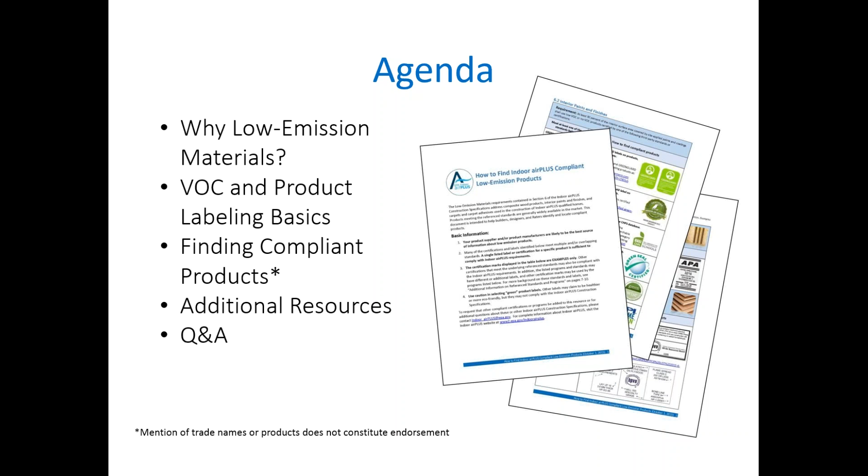If you know where to look, they are accessible, and hopefully Nick will walk you through this resource that is online and also in your panel for the webinar. You can download this document to the right as well as the construction specifications so that you'll have these to work with. Hopefully many of you have already been using it. We'll talk a little bit about some other additional resources, and then our hope is that we're going to finish in plenty of time for some Q&A.

We're assuming that all of you on this webinar have some knowledge of Indoor airPLUS, because we're digging in here to a very specific piece of the overall program. But this one slide is for the few that may not be fully oriented to what Indoor airPLUS is. As I'm sure 90% of you know, this is a companion label to the Energy Star label

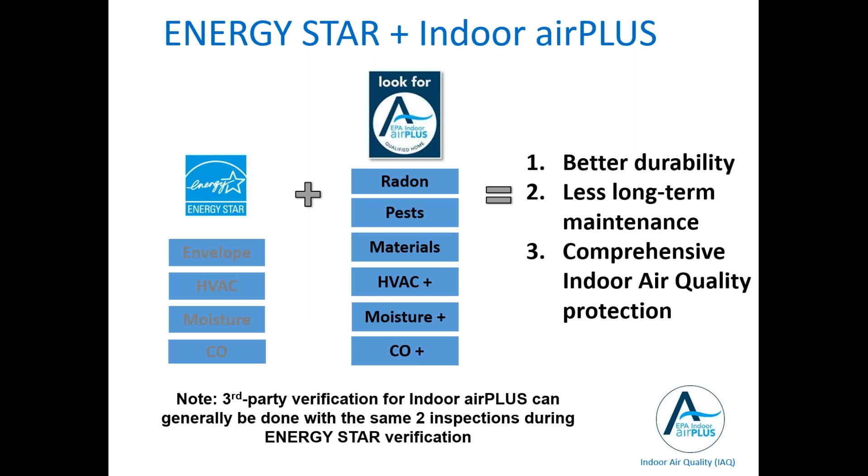that adds some additional source controls for some specific pollutant types onto the already very sound building science foundation that is the Energy Star program. And so the 6 major areas that we cover in terms of pollutants are radon, pests, materials or product emissions, HVAC, moisture, and combustion pollutants. And today we're just going to focus on the materials, which is section 6.

The construction specifications are very important for everyone to have and utilize whenever they are trying to either develop specifications for a home that are compliant, or you're rating a home. You need to really know what the specific language is in the specifications themselves. So while the checklist is helpful and the resource for things like the emissions is helpful, none of it is a substitute for the spec.

So revision 3 is the latest spec. We put that out last fall, right after Energy Star revision 8 came out, and so everything is aligned with Energy Star revision 8.

Okay, so let's start with, it seems like an easy question, but it's actually really complicated, and that's what are VOCs? Because VOCs are essentially what section 6 is all about. There are, as I'm going to tell you about in a minute, multiple definitions of VOCs, but in general, this is a large group of carbon-based chemicals that easily evaporate at room temperature. That's kind of the basic definition. Examples include many that you've heard of: acetone, benzene, formaldehyde, perchloroethylene.

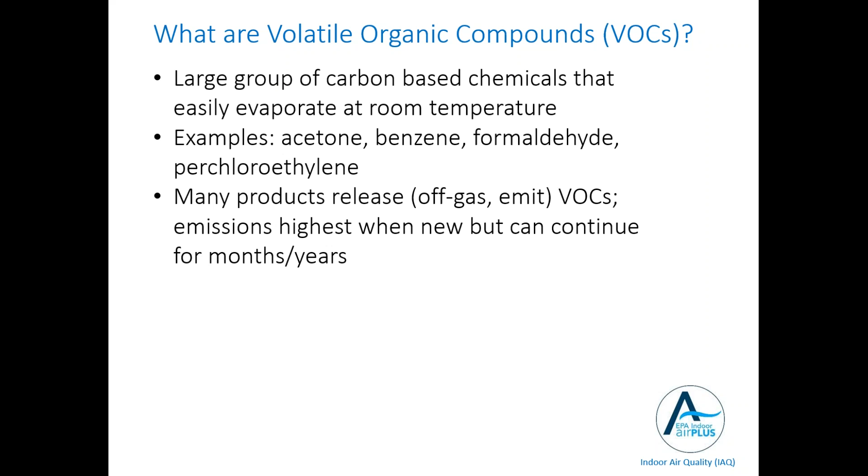There are thousands of VOCs that are present in a variety of products and that are emitted or off-gas from those products over time, and are generally much higher when the product is new, higher when the product is wet applied, and diminish over time, but can continue for months or even years, and some for many years at very low levels. So this is all about trying to produce homes with products that release the least harmful and the least quantity of VOCs.

There are a lot of complexities to levels in homes. It's not easy to really ascertain what levels you may have at any given time, because there are lots of things in play: the amount of the VOC, the rate of release of the VOC, and that can be affected by things like temperature and humidity, room volume, ventilation rate. All of these things impact the degree to which VOCs may build up in a home.

There are studies from quite a long time ago, actually, but there are studies of VOCs in homes that have consistently shown that levels can be 2 to 5 times higher than outdoors for VOCs that are present indoors, typically because of an indoor source. And immediately after use of some products like an aerosol, you're going to have very high levels and potentially very high exposures to some of these VOCs.

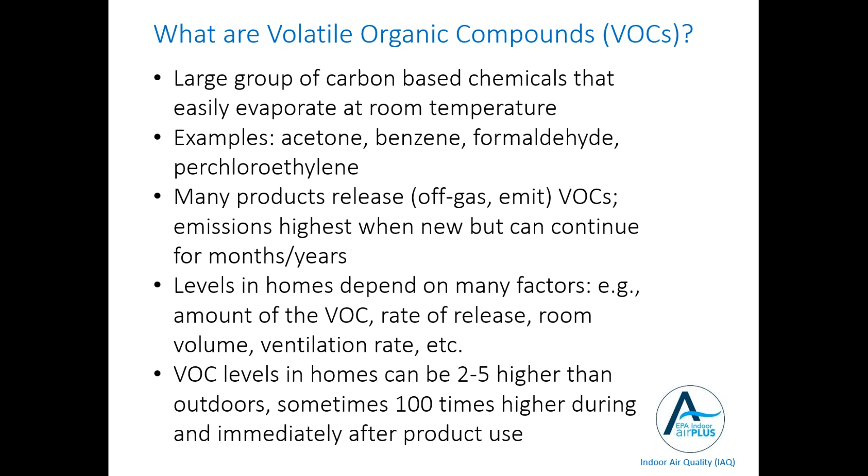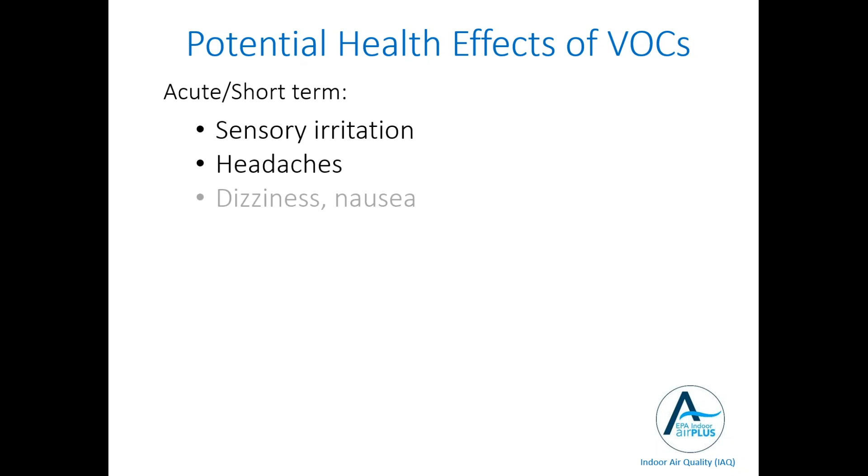We don't know everything we would like to know about VOCs. We know a fair bit about some. We know next to nothing about others. We do know that a lot of them have the potential to cause health effects that are both acute and short-term, which are things like sensory irritation, headaches, dizziness, nausea, allergies, asthma, as well as chronic and long-term effects, and those include an increased risk of cancer and potential for liver, kidney, central nervous system damage.

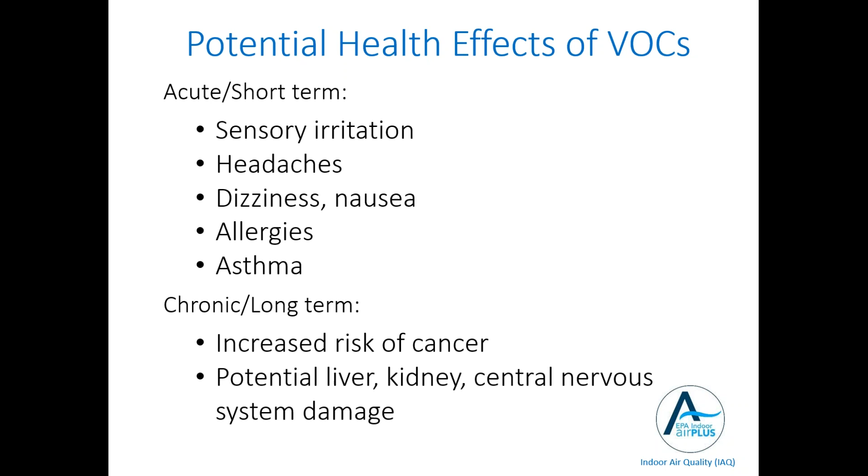So whether or not an individual VOC is going to cause harm or potential health effect to an individual is also unpredictable to a large extent. So much of what we do in indoor environments is do our best to try to keep levels of all contaminants as low as you reasonably can. And low-emitting materials are one of several ways of trying to keep pollutant levels down.

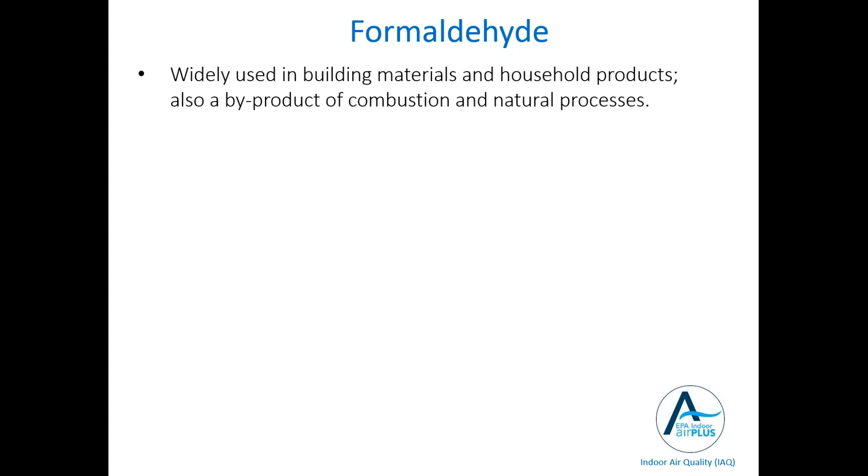Formaldehyde I'm going to touch on because a good chunk of Section 6 addresses formaldehyde emissions. I think everyone is quite aware that formaldehyde is probably the most widely recognized by name of VOCs that are out there, partly because it's so widely used in building materials and household products. And it's also ubiquitous in nature. It's naturally produced and forms through a variety of processes, including combustion of fuels. So you will always have some level of formaldehyde indoors and out. The issue is whether or not you have levels of formaldehyde that are significantly elevated and pose potential risks.

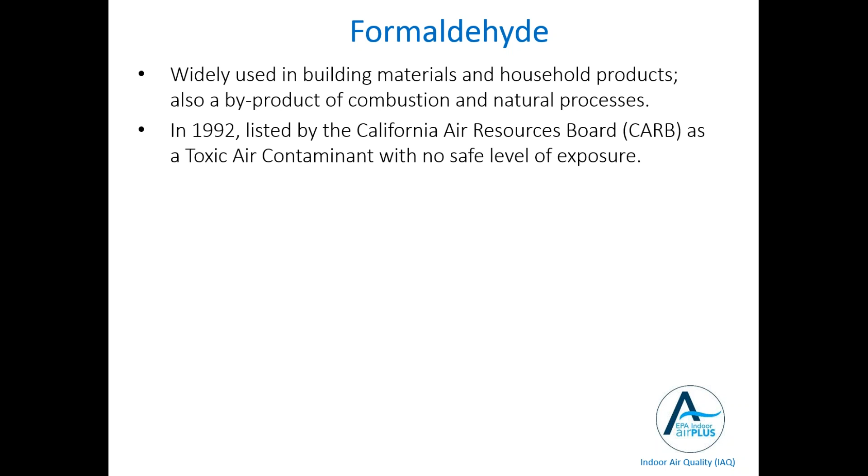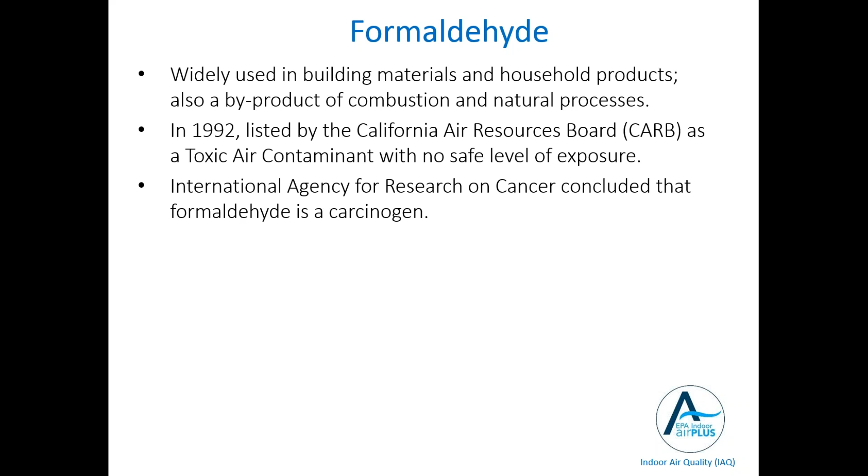In 1992, California Air Resources Board first identified formaldehyde as a toxic air contaminant and decided there was no safe level of exposure. IARC, the International Agency for Research on Cancer, has concluded that it's a known carcinogen. EPA considers it a probable carcinogen at this point. Formaldehyde has been linked to lots of different kinds of effects in the near term, exacerbation of asthma in those who are formaldehyde sensitive and possibly other asthmatics as well. It is known to cause eye, nose, and respiratory irritation and difficulty breathing and nausea. So formaldehyde is a bad actor.

You've all heard of Lumber Liquidators and the issues that go around episodes of high formaldehyde levels, generally from composite wood products. It goes back to the FEMA trailer issue several years ago, and periodically these things crop up. So formaldehyde is clearly one of the actors we're trying to address here.

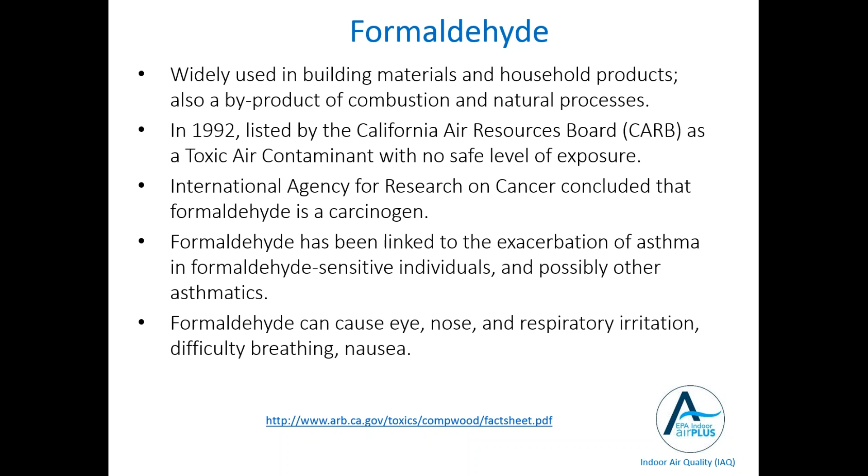So the field, as I think many of you are aware, because we know less than we'd like to about health effects of VOCs and measuring them poses challenges, is really a complicated and evolving field. And so the programs and labels and certifications have evolved in part because of the history of how VOCs have been treated over the course of several years.

And this slide is going to be an important one for people to sort of get the distinction between why VOCs, as they are regulated, are not necessarily all of the VOCs that we care about in the indoor air. But VOCs have been regulated under the Clean Air Act for decades, and the South Coast Air Quality Management District in California has been regulating VOCs for decades.

But the Clean Air Act really is only regulating the VOCs that react with sunlight to form ground level ozone in outdoor air. They are not at all concerned in the Clean Air Act about indoor air pollutants. And this is simply because when the Clean Air Act was passed, indoor air just wasn't even on their radar. It just didn't even get considered.

And as a result, there are VOCs that are exempt from the Clean Air Act, but are still of concern potentially indoors. And these are things like perchloroethylene, which is the commonly used chemical in dry cleaning, methylene chloride that's used in lots of different consumer products, paint strippers, cleaners, a whole range of products, and acetone, which is a very, very common solvent widely used in a great many household products. These are things which are exempt from the Clean Air Act.

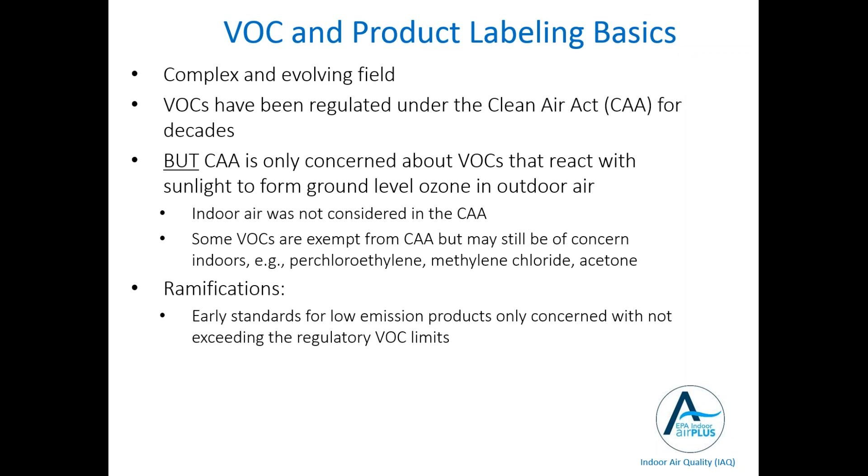So the upshot of all of this is that because the early standards for low emission products were only concerned with not exceeding the regulatory VOC limits, most of the programs in the early years, and we're talking 70s, 80s, even into the 90s, were concerned with the content of a particular product in terms of the amount of VOC going into the product, either by weight or by volume. But again, only concerned with those VOCs that are actually regulated, not the entire universe of VOCs.

And so they were concerned with total volatiles, or TVOC as some of you have heard the term, but they weren't paying attention to the individual VOCs that are actually emitted into indoor air. They were concerned with the total amount that might be emitted to the atmosphere to form ground level ozone in the outdoor air.

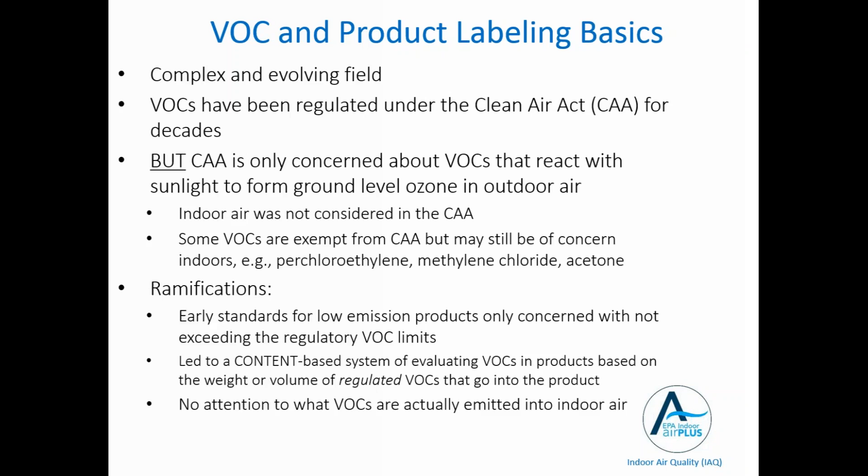So in indoor air, we're concerned with a very different population, and those are the populations who are spending 80 or 90% of their time in their homes, in their schools, and in other buildings. And we are concerned not just with what may be given off of a product in terms of total volatiles, but we're concerned about the individual chemicals that are present.

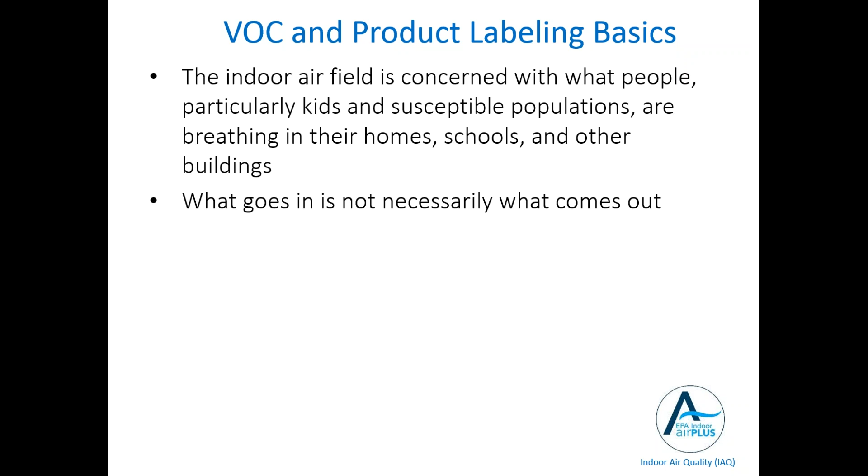Another fundamental truth is that while one might think that what goes in is what comes out of a product, that's not actually true in many cases. There are a lot of chemical reactions that occur within the product or in the application of a product that don't allow you to fully predict what is going to be emitted from that product. And so over time, people have started to realize that this was a big omission in the early programs.

And so a lot of these content-based standards have become really much more rigorous. They're still just concerned with what's going into the product, but a lot of them now have long lists of prohibited chemicals. You can't be certified under a particular content-based standard if you have carcinogens or mutagens or things like that. So many of them have gotten really very, very good. At the same time, it's still true that the only way to know exactly what is coming out of the product is to do emission testing.

So the Indoor airPLUS requirements that we have in the program, not just for low-emitting materials but across the board, are really about trying to establish some best practices for builders to help them offer safer and healthier homes.

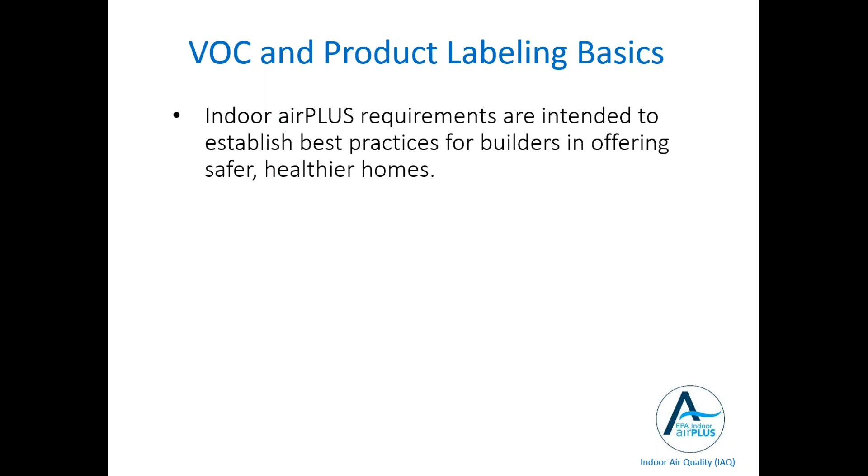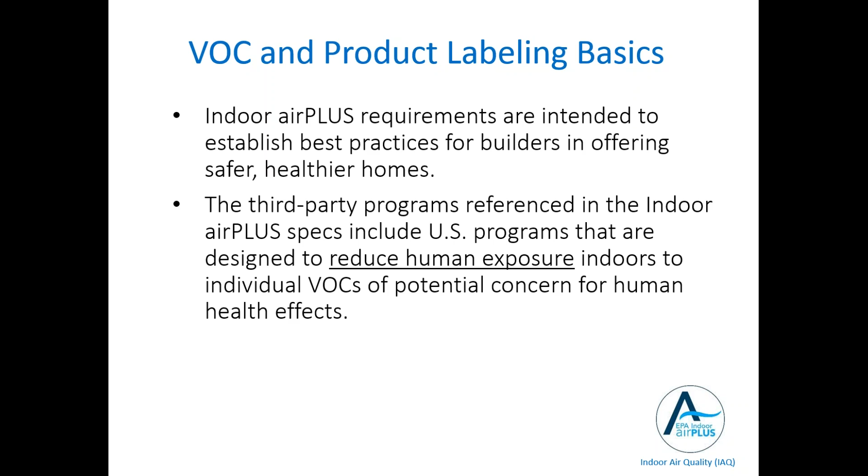In the development of the program back in the late 2008-2009 time period, we looked at the third-party programs that are referenced in the spec as those that are particularly designed to try to reduce human exposure indoors to individual VOCs of potential concern for human health effects. So as we did that, while there were some leading programs that are referenced in our spec, there are others that may not be cutting edge, but which are still allowed, and we'll get to that in a second.

One of the things that people often don't fully understand is why we require that the low-emitting materials be certified under some third-party program or standard rather than strictly allowing manufacturers to self-certify that they are low VOC or zero VOC. And for all of you who are in the Indoor airPLUS program and the Energy Star program, you know full well that third-party verification has a lot of benefits.

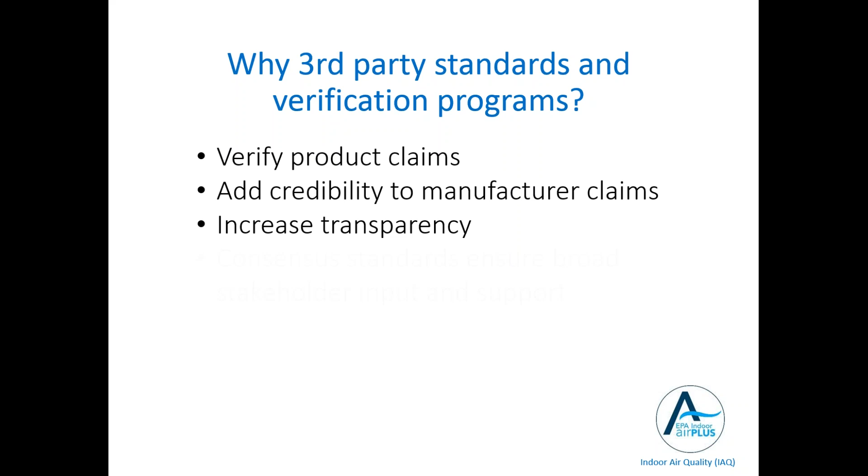It verifies the product claims. It adds credibility to manufacturer claims that they might not otherwise have. It increases transparency. People have a better idea of what it is that's in a product that they're buying or speccing. And the consensus standards really ensure that there's broad stakeholder input and that there's support for the outcome of that.

Reducing greenwashing is the ultimate goal. The wild, wild west of the early days of green have really been reduced dramatically because of the use of these third-party programs. They're much more rigorous and much more focused on continuous improvement and trying to really tighten their standards as they go forward.

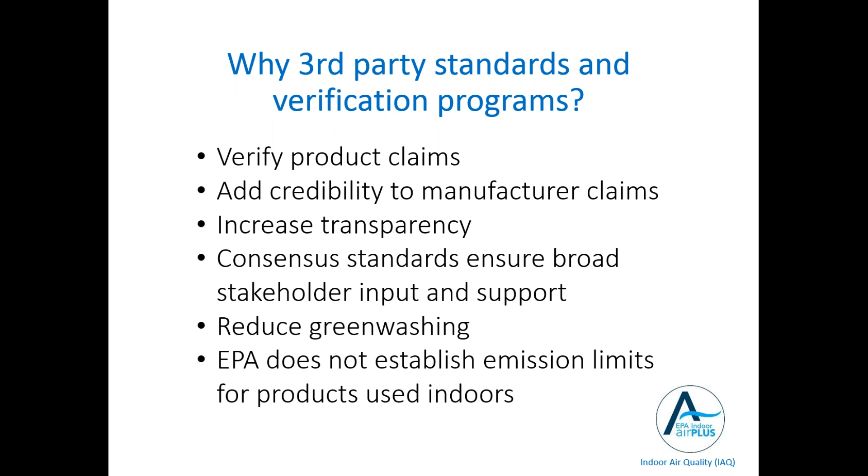Another reason we rely on them is because EPA doesn't establish emission limits for products used indoors, with an exception I'm going to talk about in a moment.

So one of the things, if you've looked at the low emission product resource that we have out there, you may wonder why there's so many labels and programs referenced in the spec. And I think the most important thing for people to understand is this is really designed to provide a range of options. Some of the labels and standards are very rigorous. Some of them are a lower bar. They're content-based. They're still pretty good standards.

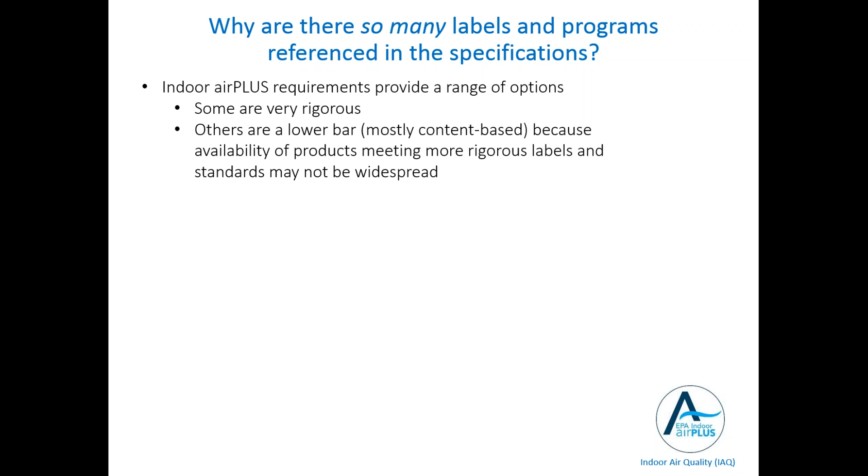But we basically are allowing for the market to come up to a place where products that are in use, and there are thousands in the market that home builders need, they need to have availability. So we have a spread of the types of standards that are included in the program at this point in time.

The important thing is you don't have to meet all the standards for a product. You only have to meet one of them. And in a lot of cases, and I'm going to touch on this and then we'll get to the meat of this, but in a lot of cases what we're really talking about here is lots of programs are actually certifying to the same underlying standard.

And two that you're going to hear a lot about and that are the easiest for you to see in the marketplace and identify as compliant products are the CARB Phase 2 formaldehyde standards from California, and another test method, which is the California Specification 01350 for emissions. And these two standards appear in lots of the programs and the labels that are in that resource, and we try to kind of demystify that for you, and Nick will show you how that actually works.

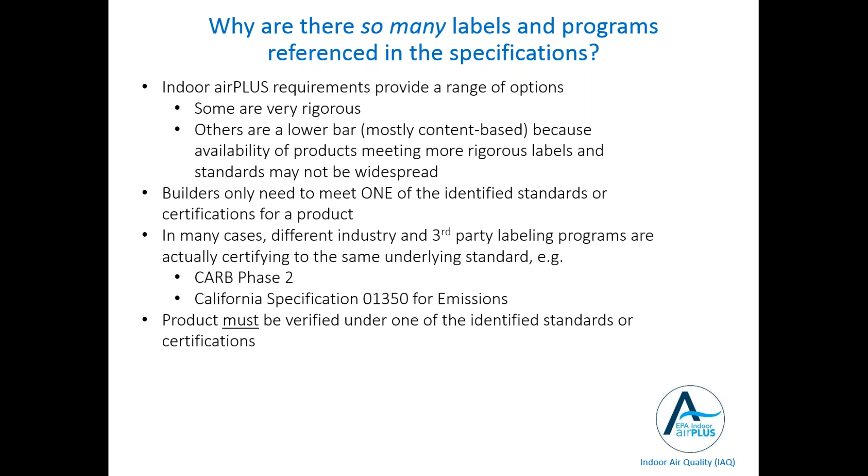The important thing is that in order for a product to be compliant, it has to be verified under one of the identified standards or certifications in Section 6. You have to be able to make that link between that product and one of these certifications.

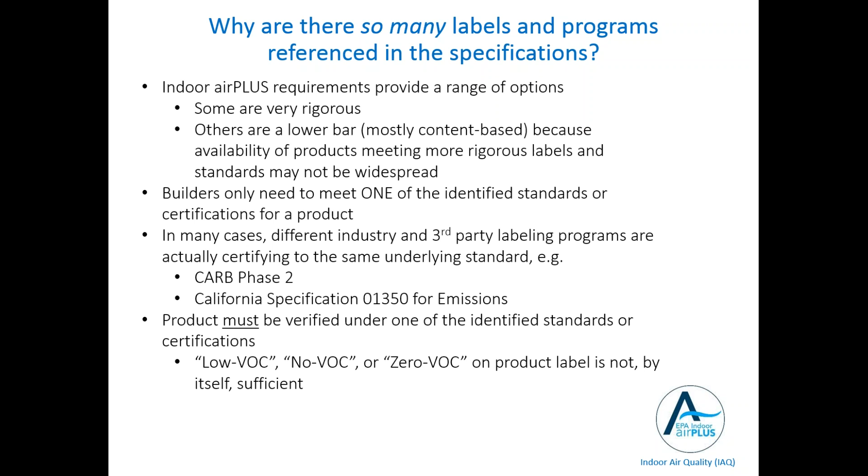A lot of folks, I think, are relying just on finding a low VOC text on a label, or a no VOC or a zero VOC on a product label. And while that doesn't mean that the product isn't compliant or doesn't meet one of the standards, you can't just look at a low VOC claim on a label and assume that that product is compliant unless you are able to make the link to the underlying standard or certification that is compliant.

So CARB 2, I'm not going to spend too much time on this because I want to give Nick enough time, but this is the standard that California established that they have been tightening over the course of years. It is currently considered the standard for formaldehyde emissions in the United States, but it is about to get superseded, which I'll mention here in a minute.

But right now, the Phase 2, CARB Phase 2 or CARB 2, when you see that on a product, that means they're compliant with the stringent emission limits that went into effect in California in 2010, 2012.

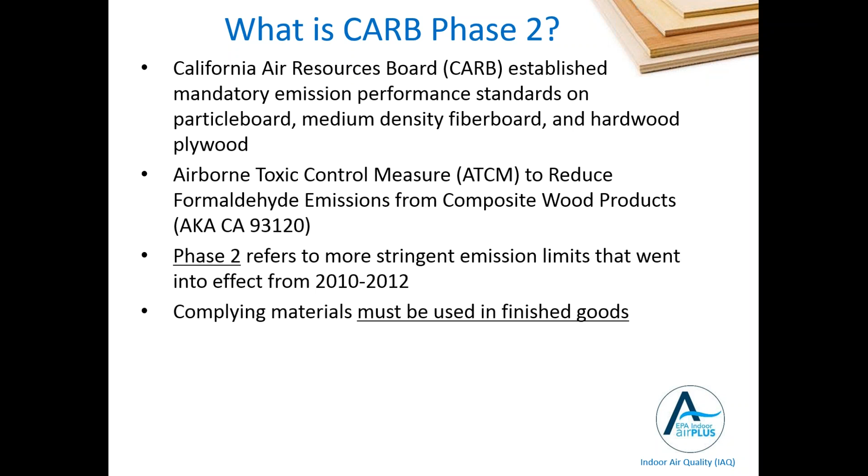They're widely available all over the country, even though it's a California standard. These complying materials—the standard applies to the core board or raw material used in the finished goods, but the complying materials must be used in the finished goods, and those compliant products have to be labeled. So I mentioned that it's about to be superseded.

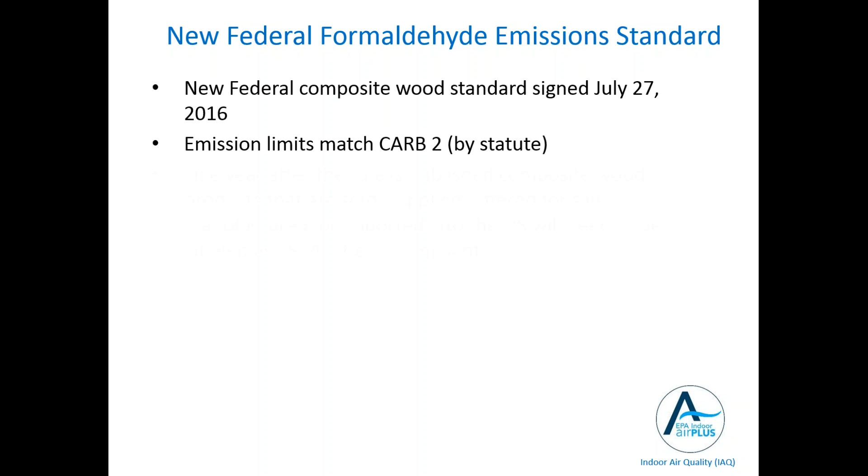Well, we just finally published the federal composite wood standard that was required under Title VI of the Toxic Substances Control Act. It was just signed about two weeks ago, July 27th, and that is a federal standard. It will apply in all 50 states. The emission limits match the CARB 2 standards, and that was required by statute. Within a year, most composite wood products that are sold, supplied, or offered for sale in the U.S. will need to be labeled as TSCA Title VI compliant.

So this will be an additional compliance option, and it'll apply to hardwood plywood, medium density fiberboard, and particle board, as well as household and other finished goods containing these products. But the key part of this is, once in effect, this is going to be a standard across the entire United States, so every composite wood product will comply.

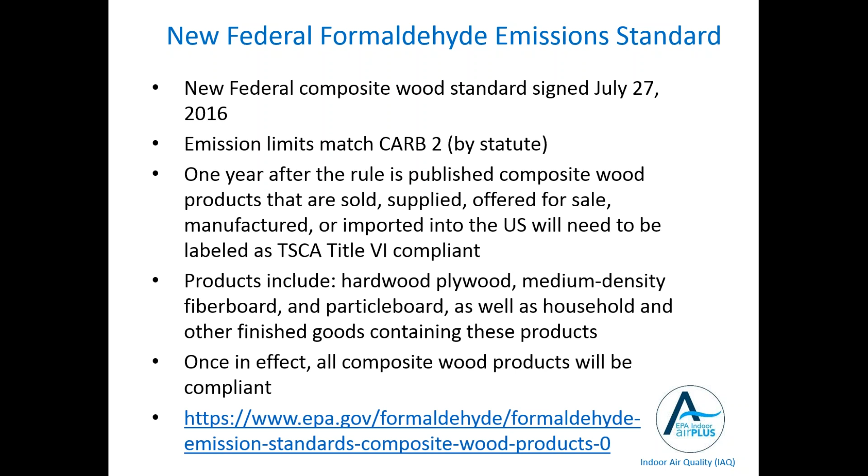So it will no longer be at all even an issue for Indoor airPLUS or other labeling programs that are focused on formaldehyde. This is where you can just go to epa.gov/formaldehyde and you can download that rule.

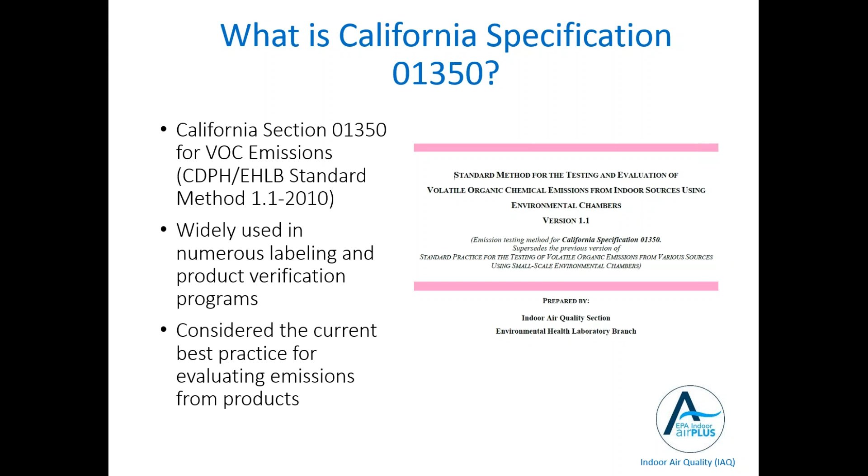So I'm going to turn it over to Nick now, but before I do, I want to just, as we get into the complexity of all of this and figuring out what product you can spec, keep in mind that this isn't the kind of stuff we're trying to communicate to the home buyer. We want to keep it simple: what you as builders are offering are building materials that are lower emitting, that are going to lower exposure to VOCs, reduce the potential for health problems, and minimize chemical smell in the home, among other benefits. But I think the important part of this is you're about to see just how easy it can be to find these products. Nick, do you want to take it away?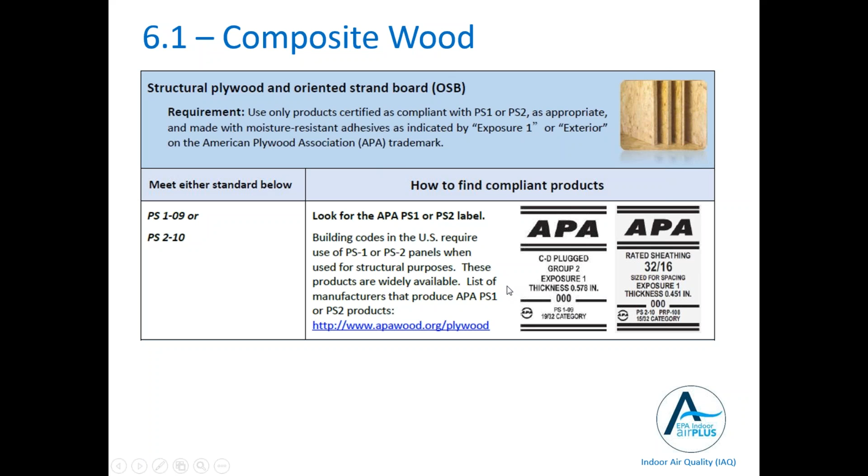This is the APA, the American Plywood Association, PS1 or PS2. On the right side, we include labels and a bit more description to help you find these products. This is very standard in the market, and for those of you on the call who are builders, you'll see this label regularly.

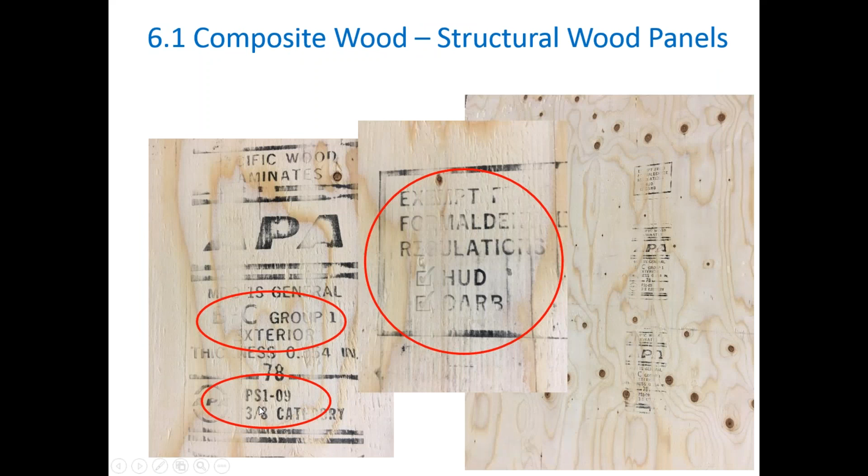So this is a very small lift. Again, you're looking for PS1 or PS2. Here's an example of floor sheathing, 3/4 inch OSB. These are very common in the market.

Hardwood plywood, on the other hand, is something that might require a little more research when you're first getting into Indoor airPLUS or trying to find low emission materials, but you'll find they're also readily available. For compliance, you have two options, and always look for the ORs in the spec or in this resource. The first option is the ANSI HPVA standard, and the second is the California Airborne Toxics Control Measure, which Bob mentioned, the California ATCM.

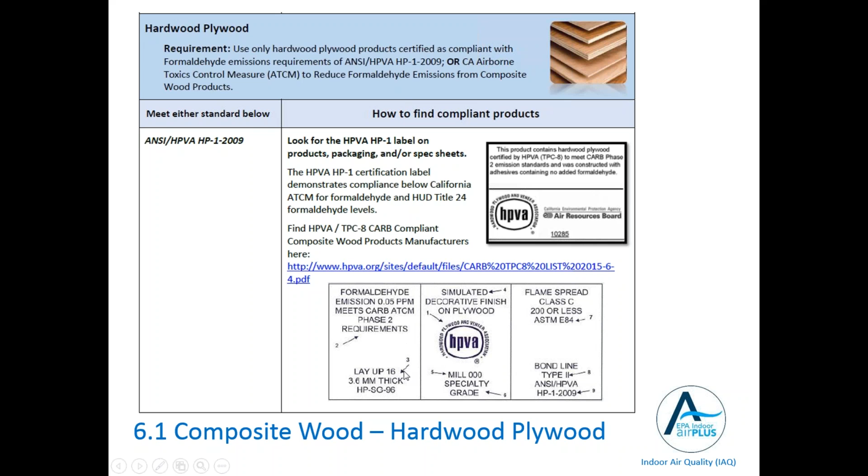So you're looking for the ANSI HPVA or CARB 2, and on this particular label, taken off of an image, you'll see it meets CARB Phase 2 requirements, and even in the right-hand corner, meets ANSI HPVA 2009. So they're both represented on this one. You can click on that link when you download the PDF to find additional compliant products.

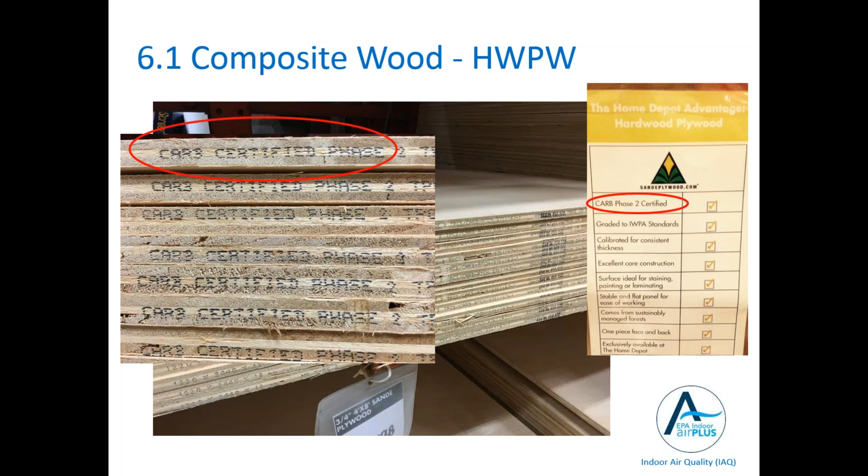Here's a few examples from big box stores. You can see this one from Home Depot, CARB certified Phase 2 right there on the side, very obvious. It's even labeled on the hang tag. Here's another example of flooring that's also hardwood plywood.

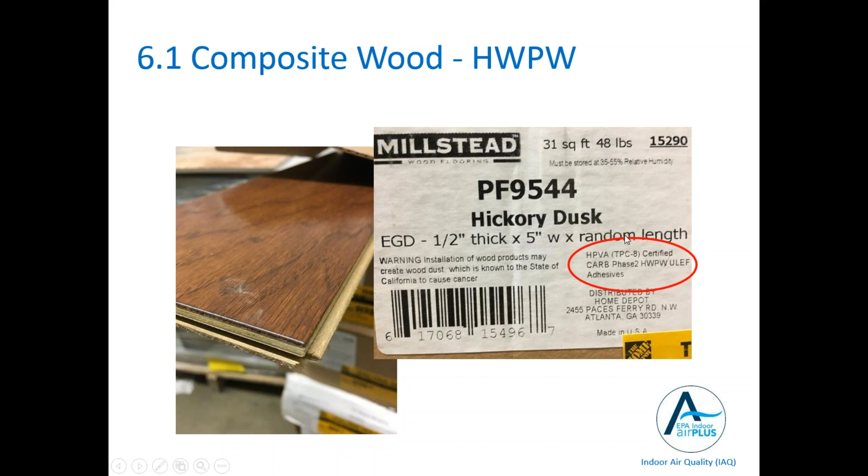So flooring might be different types of composite materials. It might be MDF, it might have hardwood plywood in it. In this case, you look on the package, and it does say HPVA certified, CARB Phase 2.

So moving down through composite woods to particle board and MDF, it starts to get a little more complicated, but you also have a few more options. With particle board and MDF, you're looking for CARB Phase 2, the California ATCM, or there are two ANSI standards. One is ANSI A208.1 for particle board, and its companion, 208.2, for MDF.

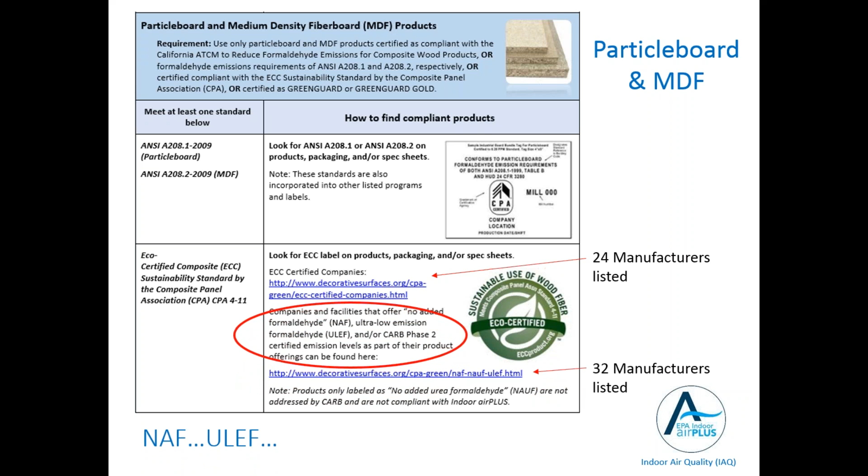Aside from those, you can find NAF, ULEF, these are no added formaldehyde products or ultra-low emission formaldehyde. I'll mention those in more detail in the next slide. You can find those also at a similar website, that link there. There's 32 manufacturers that sell NAF or ULEF products. What you want to be careful of is those that have no added urea formaldehyde, NAUF.

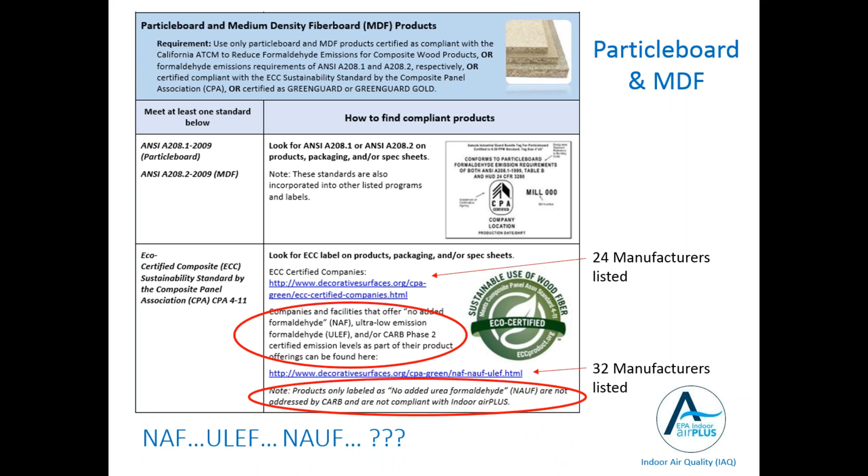With revision 3, there were some additional notes added in the specifications that help detail this more clearly. You can see a screenshot here from the specs that talk about no added formaldehyde, NAF, and ultra low emission formaldehyde. These are products with emissions consistently below CARB Phase 2 standards, and they're actually specifically exempt from the California ATCM. So they are compliant with Indoor airPLUS.

Those labeled as no added urea formaldehyde - urea formaldehyde being one type, phenol formaldehyde being another. Urea formaldehyde is generally considered the worse actor of the two, but this only means they've not added any urea formaldehyde, not necessarily phenol formaldehyde. They're not necessarily compliant with the CARB standards, and they're not specifically addressed by CARB, so they are also not compliant with Indoor airPLUS.

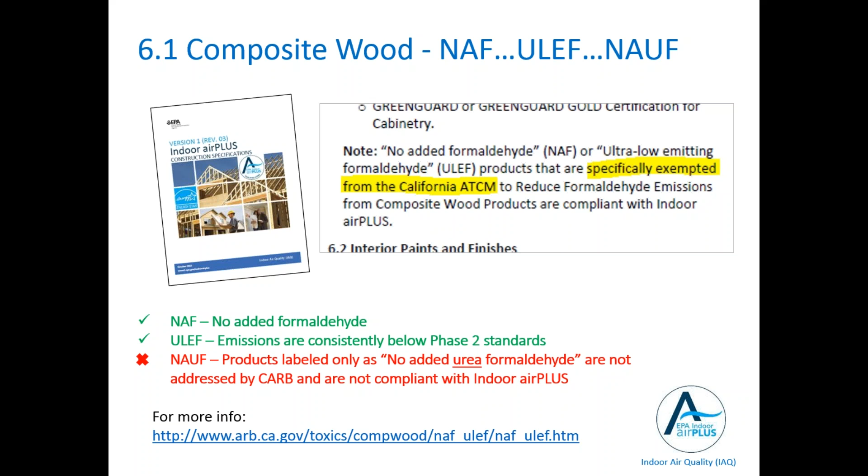There's a number of new acronyms and letters to sort through as you're shopping around. I think you can take this resource with you for reference, and just look for those that are no added formaldehyde or ultra low emitting formaldehyde, or some of the other third-party labels we already mentioned.

The fourth one in this section is GreenGuard or GreenGuard Gold, and you'll see this come up in other sections of the spec as well. You can visit the UL website if you're looking for GreenGuard products, and sort by manufacturers, brands, or product category, and you can find all kinds of adhesives and sealants, cabinetry, countertops, and flooring that are GreenGuard or GreenGuard Gold labeled.

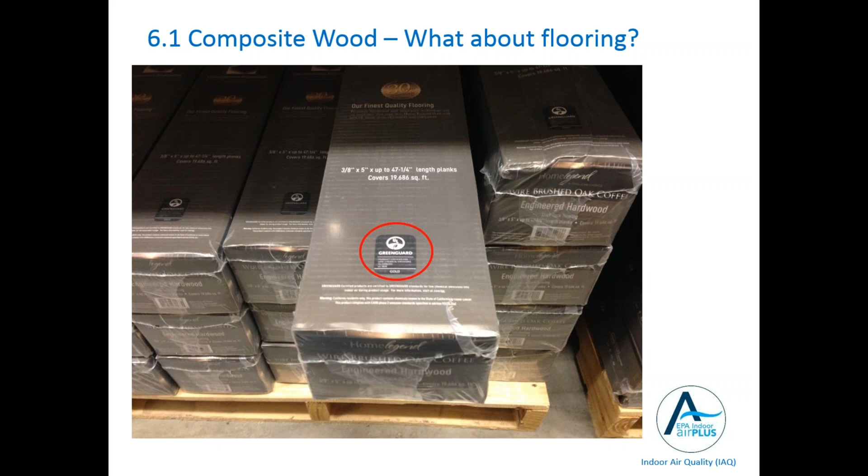So another great option. So what about flooring materials? We mentioned flooring a little bit earlier with hardwood flooring. You'll see GreenGuard show up fairly regularly with composite flooring and composite wood. Here's one example of a CARB Phase 2 label, printed very small on a box, but you can find it.

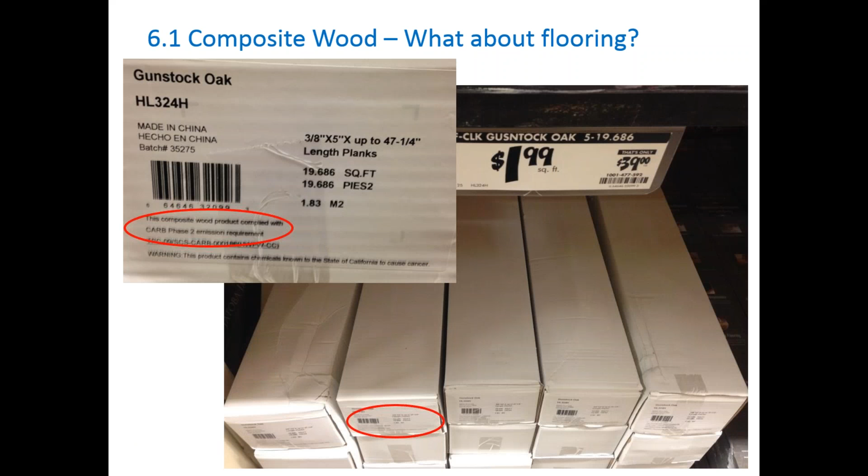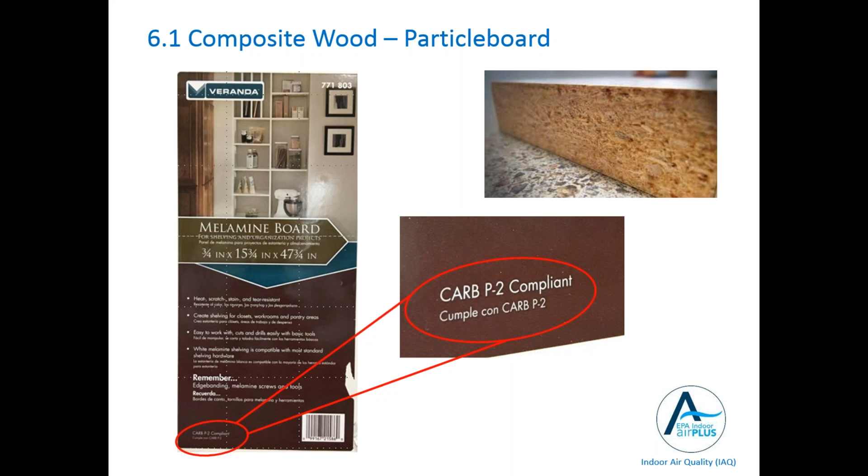Particle board, melamine in particular, is another one to consider. Some people often forget that it is a composite wood. It's used regularly in shelving materials. Here's one that is CARB 2 compliant, so they are also available in the market.

MDF, if any of you have ever worked with MDF for an extended period of time, you may have experienced some type of respiratory issue. I have in the past when I've done a lot of cutting and shelving work. Running MDF through a table saw really does produce a fair amount of dust in the air, but there's the formaldehyde issue with this as well.

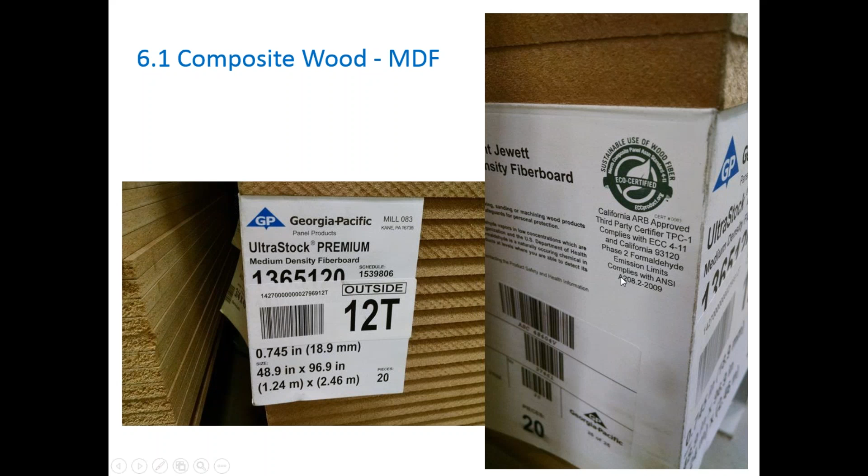Fortunately, there are a lot of great products out in the market now. Here's one from Georgia Pacific. You can see a full pallet of this. And on the side of it, it actually shows that it meets three of these labels: the Eco-Certified label, CARB Phase 2, and the ANSI standard.

Wainscot panel is another one. Trim products, baseboard, all those types of pieces that go into our house that are more dimensionally stable when they come in a composite wood form. Sometimes easier to apply, but you do need to look for the compliance.

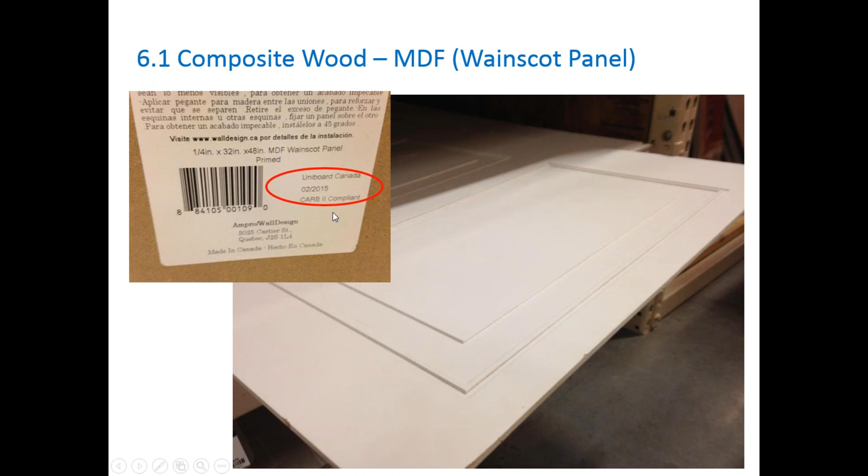When we move on to cabinetry, this is kind of a subset of composite wood. And again, we have all of the options available that we just saw. So cabinet components that comply with the appropriate standard above—that's the ANSI standards, the ECC label, or GreenGuard Gold. But then there's a few other labels as well that we can look for.

One of them that you might see in the market a lot is the KCMA label. The KCMA Environmental Stewardship Program, that's the green label there. You don't want to confuse that with the blue KCMA label—that's their kind of standard cabinetry certification. Look for the green Environmental Stewardship Program label with the tree.

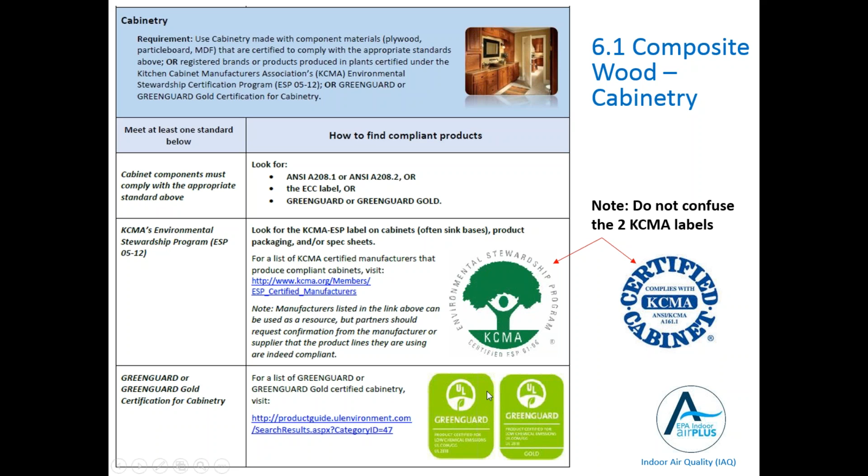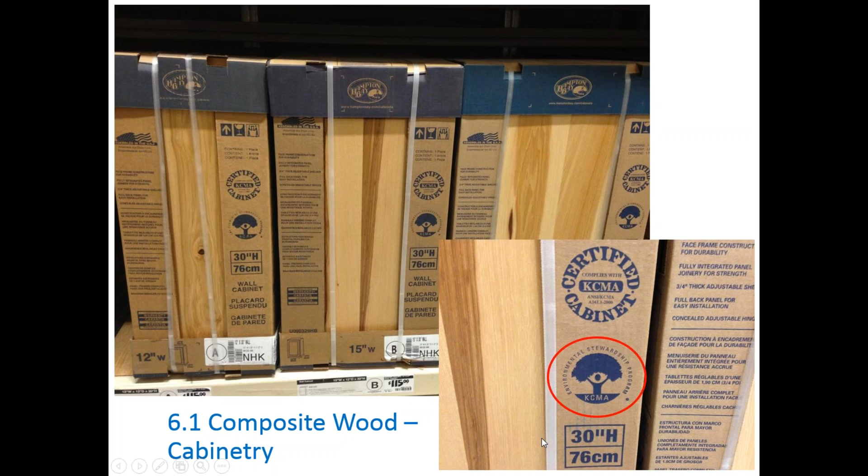So, another great link there to find those products. And again, GreenGuard or GreenGuard Gold specifically for cabinetry is another place to look. And if you shop around, you'll again see these labels: the KCMA standard label, and also the ESP program label. Sometimes you'll find these compliance tags on the back side of cabinets.

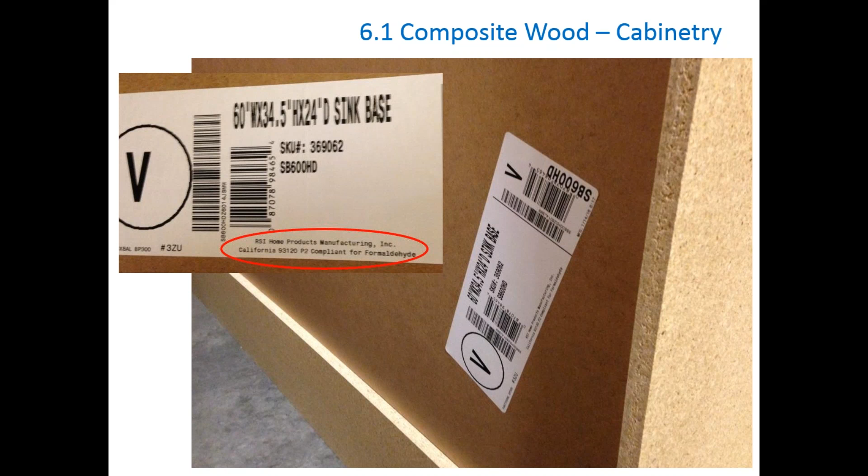In this case, this meets California 93-120 for formaldehyde, so this one is compliant. But it's really important from the beginning for the builder to know what it is they're purchasing and to communicate that with the rater, especially if the only place this label is seen is on the back side of the cabinet. So once it's installed, you want to make sure you have good documentation and verification of that up front. Work with your rater or verifier so they know what it is you're putting in, so they can feel confident about the checklist process itself.

So I think we have time for a real quick composite wood quiz. You're not going to be able to participate in this quiz other than to give yourself a pat on the back if you answer these right.

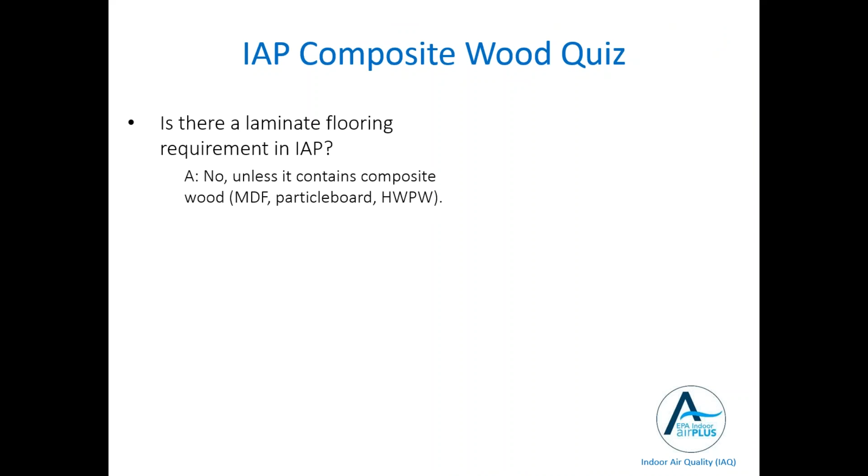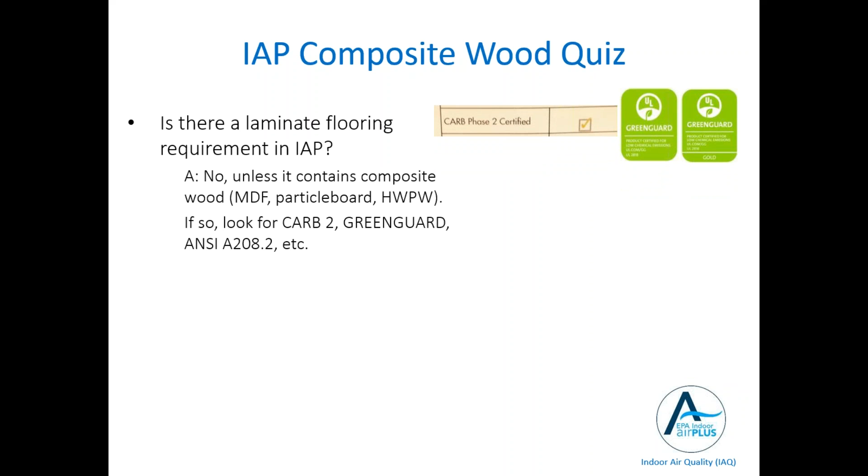Is there a laminate flooring requirement in indoor airPLUS? It's a trick question, sort of. It's really no—there's no laminate flooring requirement per se, but if it does contain composite wood in your laminate floor, whether it's MDF, particle board, or hardwood plywood, then yes, it needs to comply. And if so, you're going to look for CARB 2, GreenGuard, or the ANSI A208.2 standard.

The next one for the raters: how do I verify compliant hardwood plywood? What do I look for to verify it? You want to look for the ANSI HPVA HP-1-2009 label or CARB 2—two options there. And then, how do I verify cabinetry from a rater?

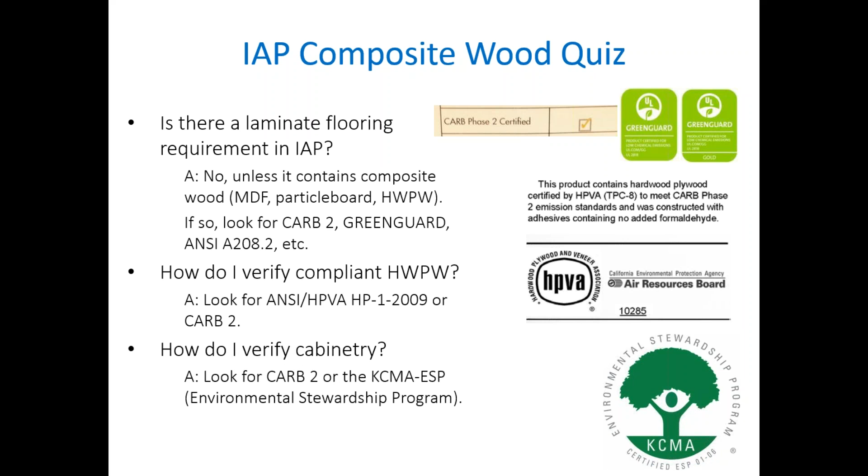A very simple one is to look for the KCMA label, or again look for CARB 2 for cabinetry. Green Guard is another option, of course. So that kind of takes us through composite woods.

We're going to move on to 6.2, interior paints and finishes. On a regular basis we get questions about paints and whether or not they're compliant with Indoor airPLUS. I think this resource should help those of you who are considering switching paints, or not quite sure what you're using right now, to dive in and investigate this.

So there's a number of them, you see a few of them here. The specific requirement is that at least 90% of the interior surface area covered by site-applied paints or coatings should use low or no VOC products certified by one of the following. So again, it's not just low VOC or no VOC, but it has to have one of these certifications.

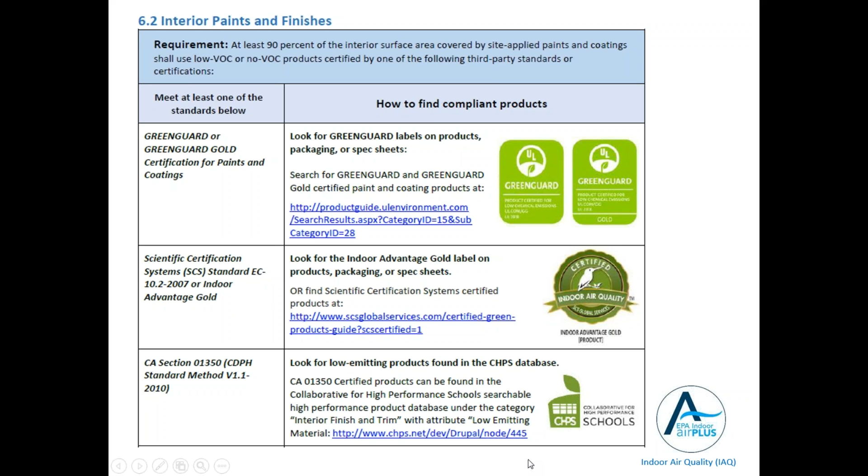Green Guard is on the list. The Indoor Advantage Gold label is on this list. And then also California Section 1350 — if you find something based on that underlying standard, which is again that emissions-based standard, that is compliant. And there is a database, the CHPS list, Collaborative for High Performance Schools, that has a list of California 1350 certified products, so check those out.

A few other third-party certification labels are the Green Seal Standard GS11, then also GreenWise and GreenWise Gold products, and then the Master Painters Institute has two different levels of certifications as well.

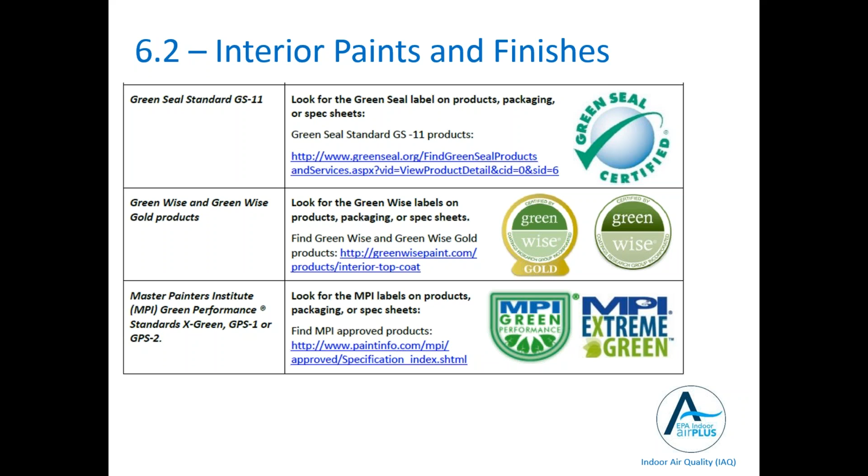I think it's important to note, as Bob mentioned earlier, that not all these standards are alike. They are not all necessarily equivalent in terms of content or emissions. Some of them are strictly content-based standards, but they are backed up by third-party verification and have some additional requirements. Some of them go to the extent of doing emissions testing as well. So at this point in the program's evolution, there's a wide range of third-party labels available, which should give you some good options for compliant paints.

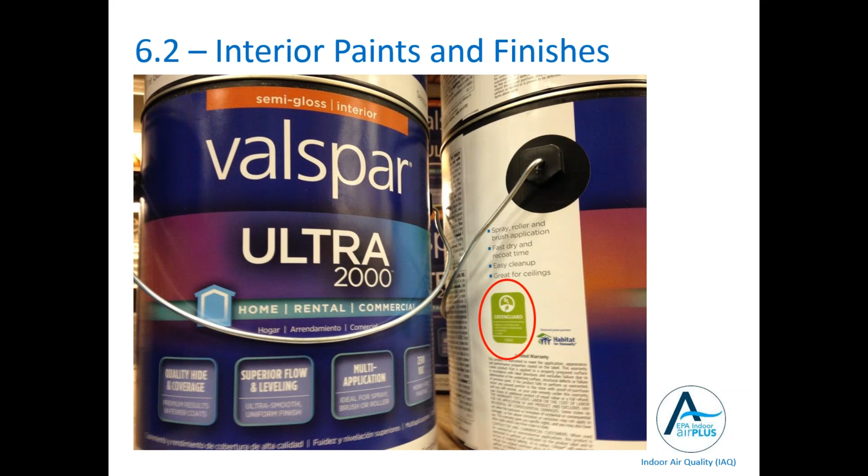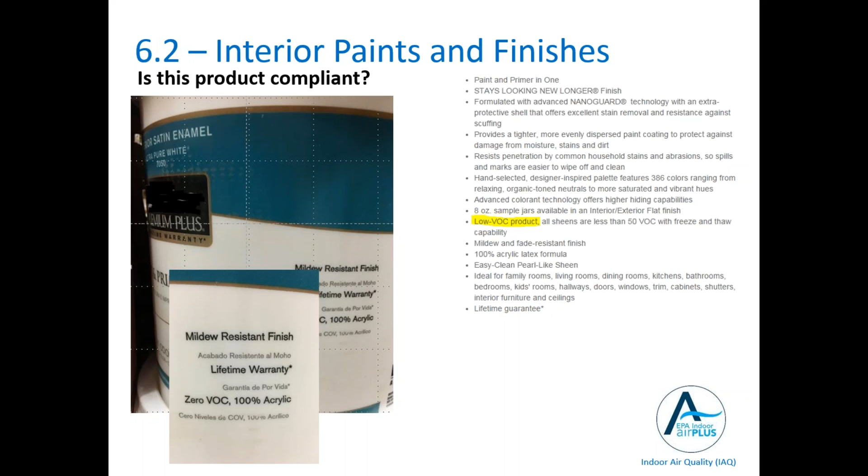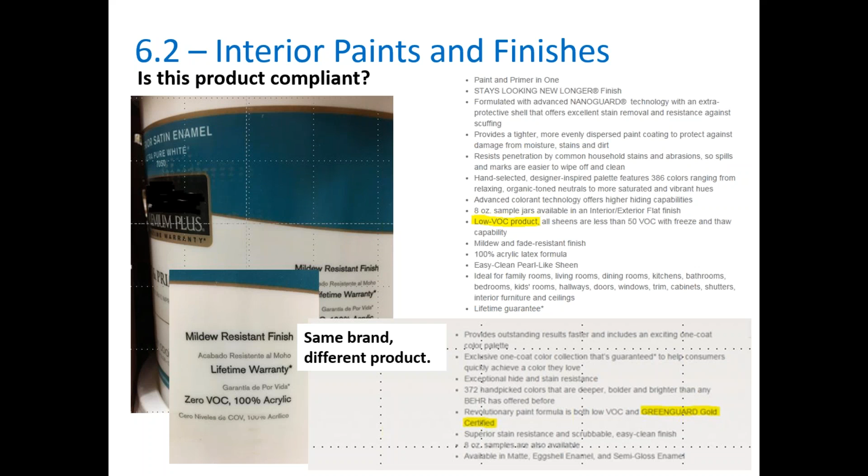If you go to a different product from the same brand, you can see that they do have one that's both low VOC and GREENGUARD Gold certified. So again, just because one brand has one product that might be certified to that label doesn't mean all their products are. You do need to do a little bit of homework.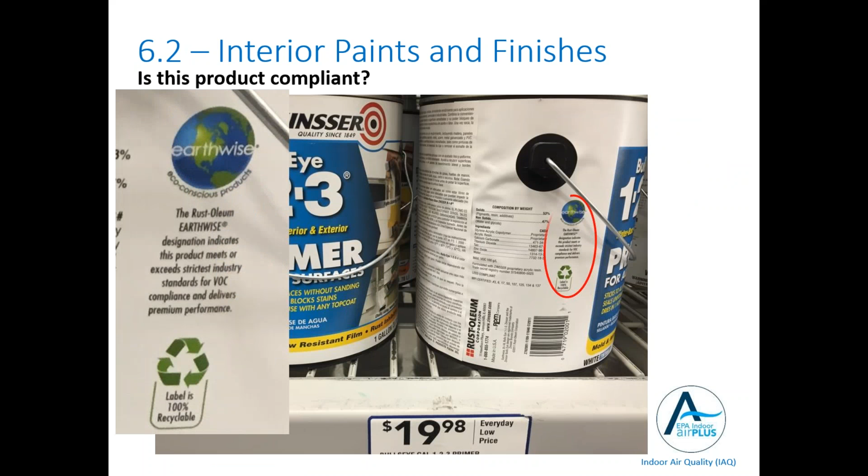Here's a common paint primer, Zinsser 123. On the back it has the Earthwise, the Rust-Oleum Earthwise designation, and that's not on the list for Indoor airPLUS currently — it's kind of an in-house designation. But if you look closer, it does have the MPI certification on the back as well.

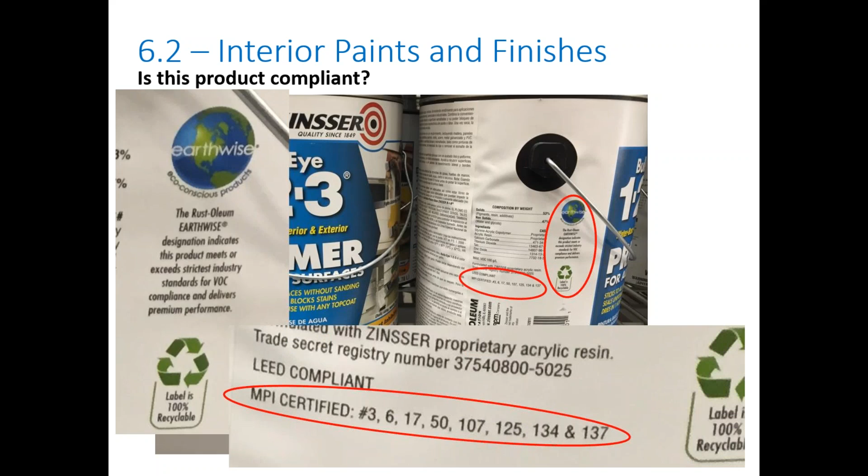And if I wasn't quite sure and wanted to do a little more investigation, I could go to the MPI website — you can find that link again in your product resource in the handouts. With a bit further investigation you can find all of the primers that are certified, and see which standard they're certified to. In this case, we're looking for GPS-1 or GPS-2, and the Zinsser Bullseye 123 does meet GPS-1. So again, a lot of great options that you can find online.

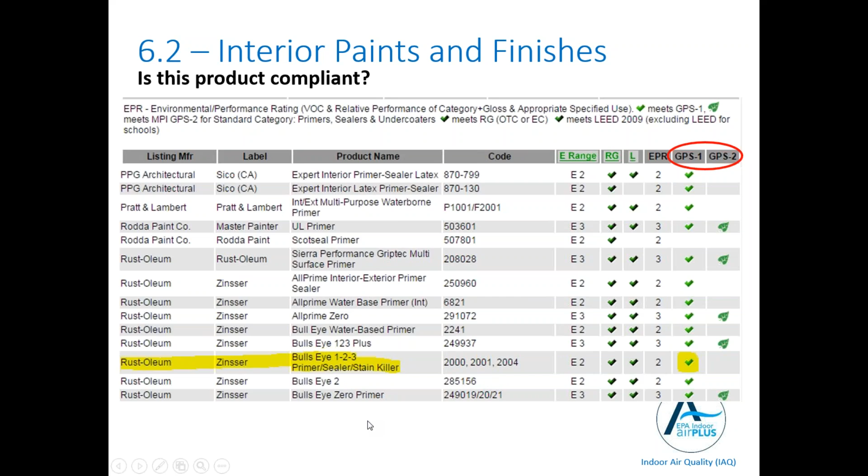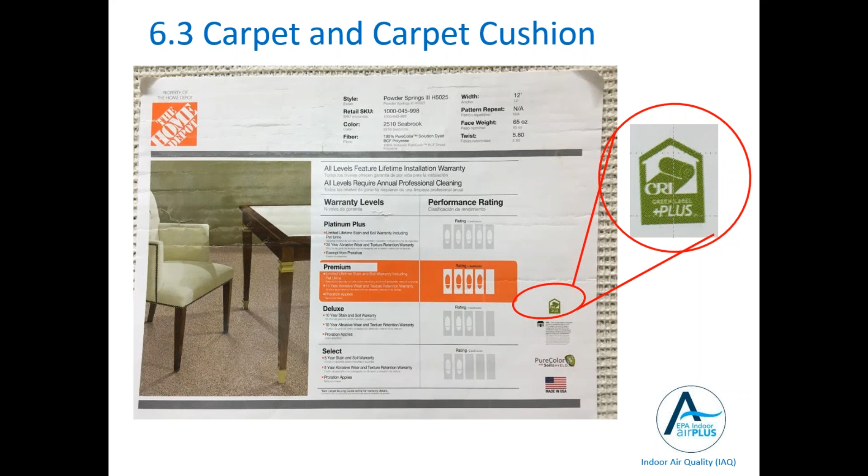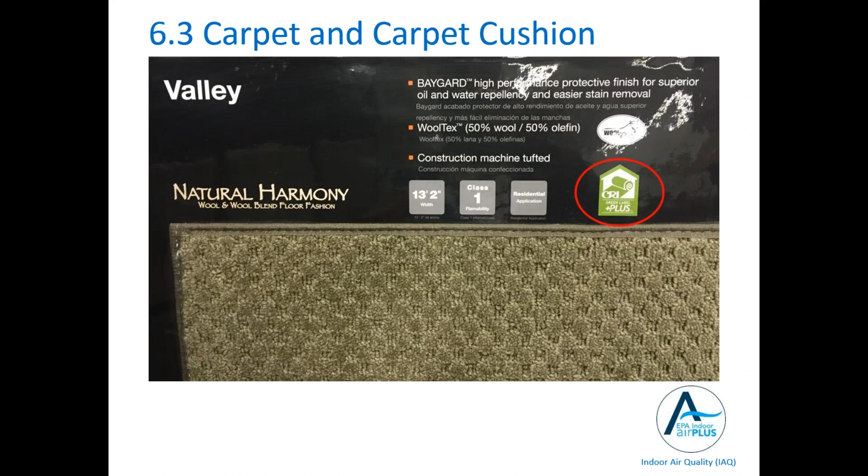Moving on to carpet, 6.3. Carpet is pretty straightforward — we're looking for the CRI Green Label Plus, or Green Label standard, and you'll see that little emblem on the back of a lot of carpet. Not all, but it's out there at the big box stores and at more local suppliers as well. It might not be the emblem itself, it might just be stated on the product as CRI Green Label Plus approved. This is for carpet and carpet cushion both. Here you can see a few other examples on the hang tags.

If you're a builder that gives your home buyer some options with carpets, it's important to consider that on the front end as you're getting into Indoor airPLUS. So one thing you want to consider is what options you're going to provide, what range of options you're going to give the consumer, so that they can confidently go find something to purchase that will meet the spec and won't jeopardize certification at the very end of the process.

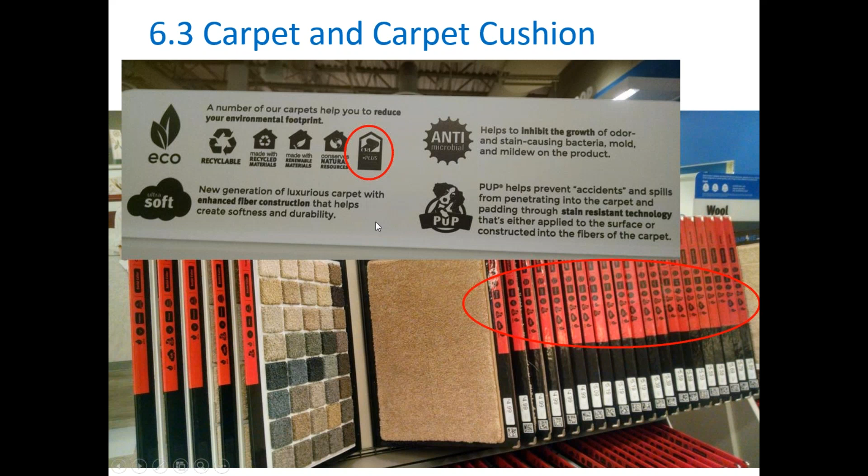So if you send them out to find their own carpet, make sure that you identify Green Label, the CRI Green Label, as an option that they should be looking for. And they might be looking at a whole bunch of different labels and logos. Some are going to say made with recycled materials, which is great, made with renewable materials, conserves natural resources. But the one we want to get is the CRI Green Label or Green Label Plus, and then they'll go to look for that on the range of options at the supplier.

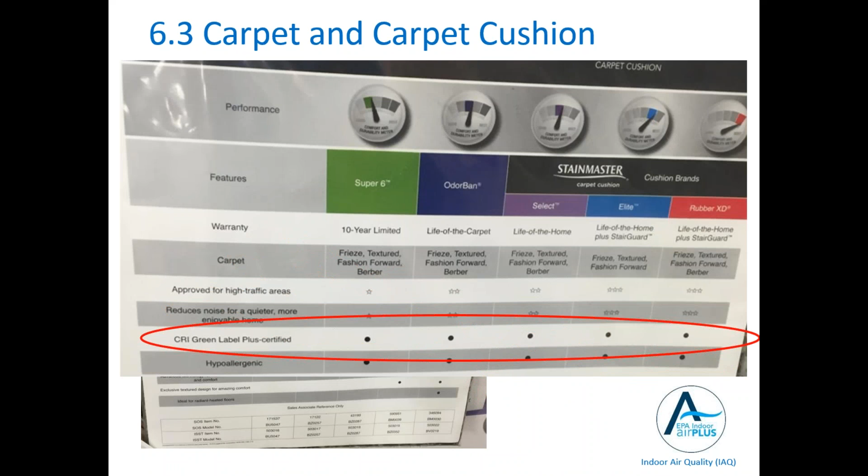Sometimes it's in smaller print on some of these labels. You do have to look closely. In this case, Stainmaster has it across a number of different cushions. So that kind of covers all three of the primary components of Section 6 of Indoor airPLUS, and at least gives you an overview of the low emission material resource.

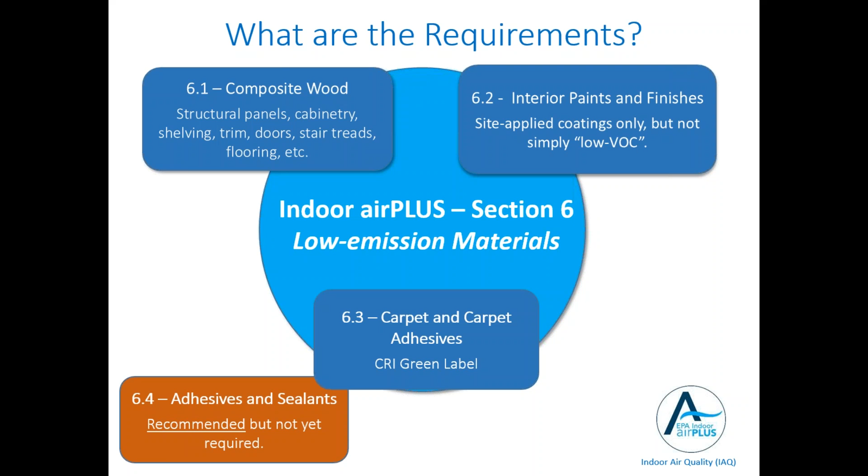There is, again, that added adhesives and sealants recommendation that has come into revision 3 of the program, and with the evolution of the program, when it started, adhesives and sealants that were low VOC, low emission, it wasn't apparent that they were necessarily going to be in the market right away, but they are now becoming a lot more readily available. So this advisory was put in and may become part of the Indoor airPLUS requirements in a future version of the program. So it's good to get ahead of this now.

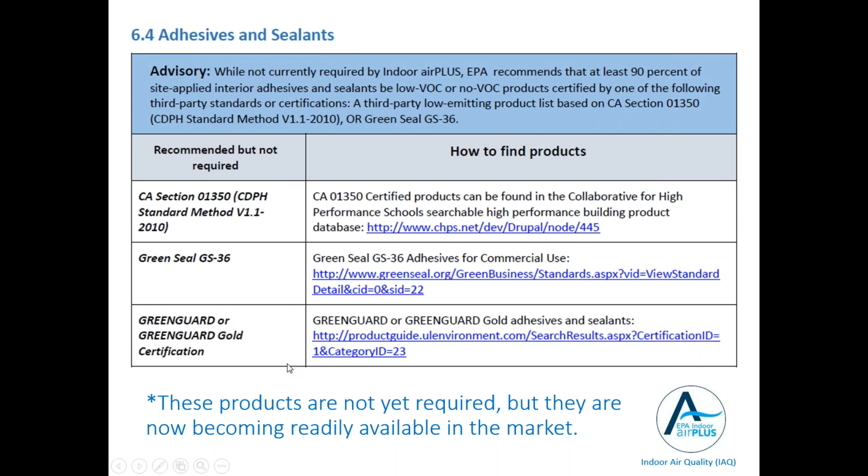If you're looking for more technical resources, more information, whether it's about Section 6, the low emission materials, or about any of the other pieces of Indoor airPLUS, we'd highly recommend going to the Building America Solutions Center. The DOE has built out a great database and resource with technical material for builders, for home energy raters, for anybody interested in high performance homes. There's guides from A to Z covering all kinds of different building components, as well as the specifications themselves for Indoor airPLUS, for Energy Star certified homes. And if you're going to take the next step to do zero energy ready homes, there's great content information there as well. So check those out.

And also, if you're wanting more information on tools and resources for marketing in particular, visit the Indoor airPLUS website. There's consumer brochures, there's website widgets, there's former podcasts and videos that have been done that you can read up a little bit about Indoor airPLUS, or communicate those to your home buyer. There's also a great sales training kit that came out this past year that you can find in your My Energy Star account, so check those out as well.